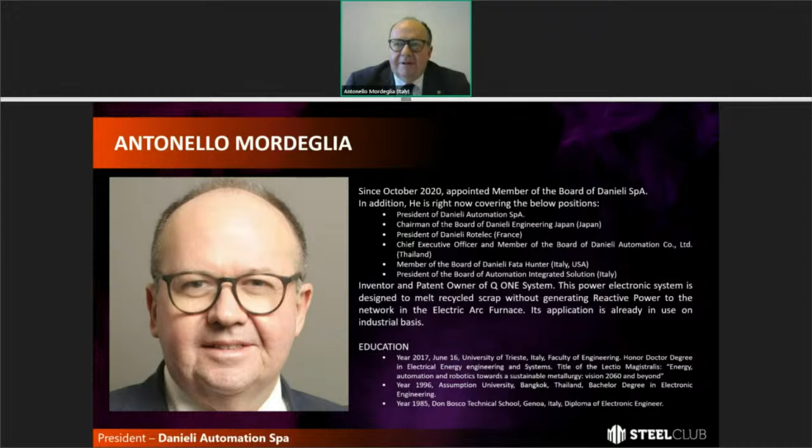It's related to a kind of review of the methods to produce steel today, and what is our intent as Danieli for the future.

As you can see here, even today when we are talking about green steel, most steel in the world is still produced with the first, let's say, technology, the conventional blast furnace, where practically the energy to melt the mineral is given by coal, coking coal, and oxygen in the converter. So practically, we have a very high environmental impact.

About 65% of the total global production of steel is still handled by this technology, because it's the most competitive, and starting from iron ore, it's also the most consolidated and, let's say, the most antique. So the point is, the emissions in this case are very, very high.

In parallel, the balance, about 35-40% of steel, is produced by electric arc furnace. There are different technologies. The process of electric arc furnace is about 120 years old. The first electric arc furnace was from Mr. Siemens, and then more new technologies came over the years.

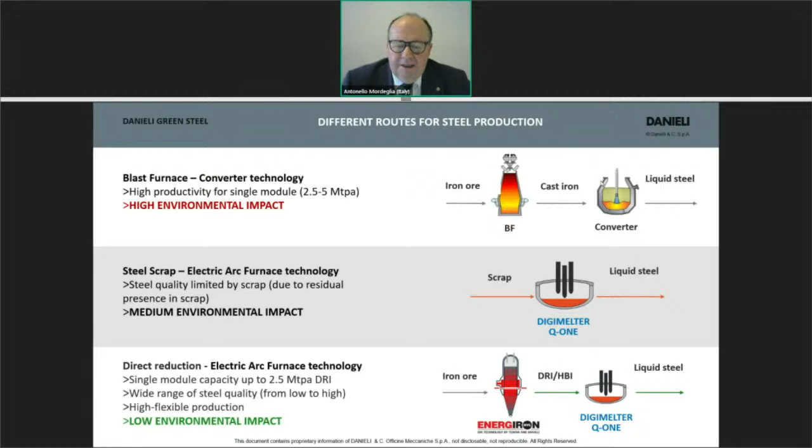Okay, next slide please. So the point is very much to move as much as possible. We need two components, two elements. One is for sure the hydrogen that must be produced by renewable energy. Otherwise, we still have an impact on the upstream part, the energy generation.

This means an electrolyzer, but one that must be somehow fed by renewable energy. On the other side, we need a lot of energy for our electrical furnace, which we renamed, let's say, giving it a new name: DDM, Danieli Digital Melter.

That is practically a new technology that will give you the possibility, with huge inverters, to use renewable energy to feed the energy to your AC, DC, AC converter.

Please, next slide. So in this slide, you can see how we practically apply this technology. We started this technology about 5 years ago as a prototype, and then we did some pilot plants, and now we're stepping it up further.

We already have a reference in the range of 100-ton digital melters. We take energy from a network. On the left side, we rectify it into a DC link that becomes a DC current, and then back with a powerful transistor. We use the same approach practically for power storage and for transportation systems, high-speed trains, normal trains, and so on—our market components. We produce again AC current.

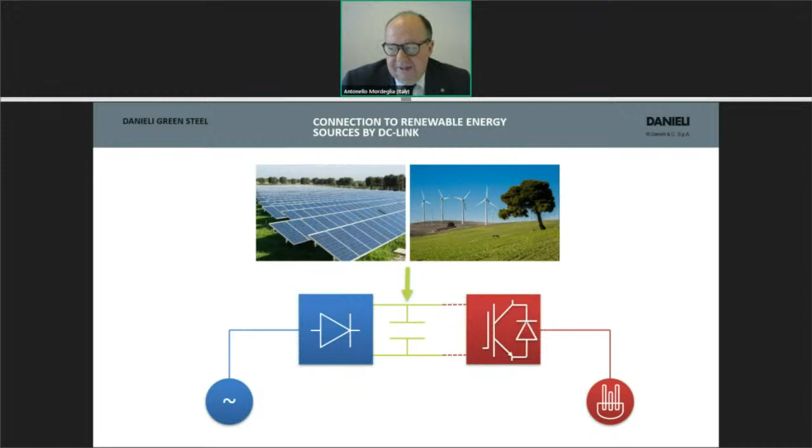This is a process that, compared to existing technology, gives you several advantages. There are advantages in terms of productivity because, due to the change of frequency during melting, we have the possibility to increase productivity or decrease consumption.

This is something we already test and operate in two plants, one in Croatia and one in Italy, where we dynamically change the frequency. Usually in the US and Canada we have 60 Hertz, and in Europe we have 50 Hertz. But that is a fixed frequency for a normal process.

What we did is change the frequency during melting, and we are achieving unbelievable performance in terms of power-on time reduction, energy consumption, and electrode consumption reduction.

The system is modular, so it's many modules, many inverters, many transformers of small size in parallel to create the energy that you need. So it's also very safe in terms of reliability for the system and for maintenance.

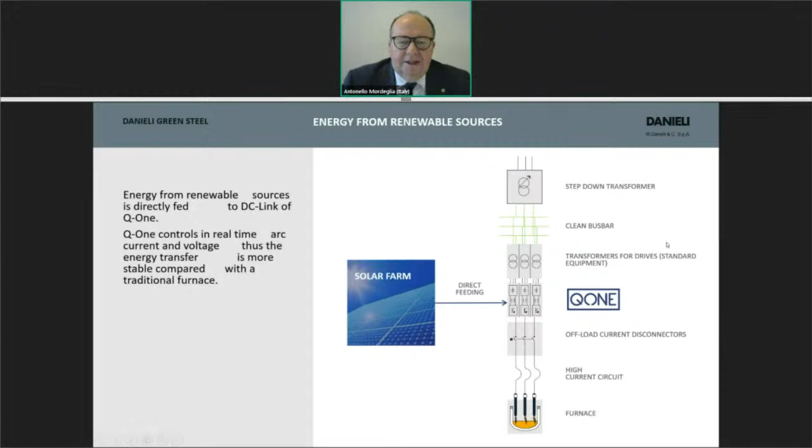Next, please. This is a kind of plant that we are right now already negotiating with several customers—a plant that is designed to be practically totally green.

How? Because you can create a kind of DC link inside your plant and run the melt shop, run the rolling mill, and your auxiliaries, all with self-produced energy or even partially from the network.

What is the vision? The vision is that more and more, the world will force us, as plant makers, to move to green. We have no real chance to stay away, because whoever implements this technology will be the winner. Whoever stays with existing technology will pay a very expensive bill called carbon tax.

And this technology is digital. Digital is outstanding because anytime we change the firmware in a device, it becomes like a new device, like your mobile phone or your computer.

In 7 minutes I cannot say too much, but this is a concept that has become an industrial product. I believe this is a very good technology for now and for the future, to think green and to think of a better world.

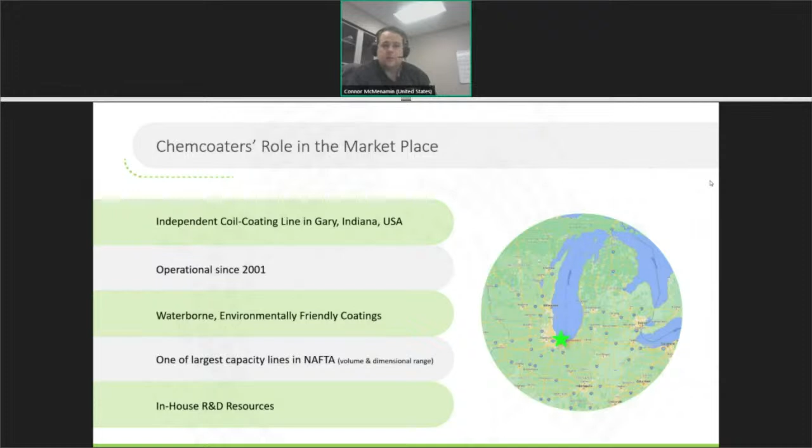What makes us a bit different, aside from our waterborne focus, is our in-house R&D capability, which has been a standout asset in recent years. If you could go to the next slide.

We were invited to talk about InterCoat ChemGuard. It's almost hard to describe this product accurately in 7 minutes, but we'll do what we can. At its heart, it is a totally unique waterborne modular coating technology that was developed here almost by accident, but really through trial and error. It is a corrosion inhibitor that we bring to very challenging environments.

We call it a zinc life extender over here. Many will not have heard of this product. It's fairly new to market by steel standards, but it's about 10 years old. So we would in many ways call it mature.

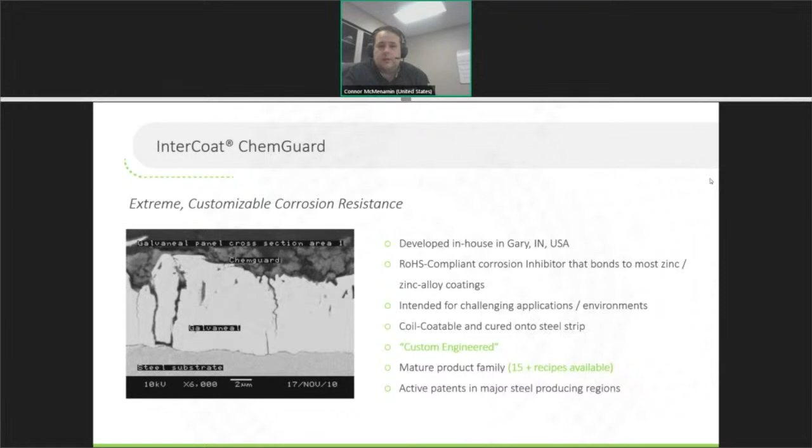This came about by tinkering, but through trial and error, and we started producing it in 2010 and 11 after a customer came to us in 2009 from the light gauge construction component area, asking for a coating that would allow them to basically upgrade or restore secondary galvannealed, add a coil coating, pass it through a cold reduction process on a strip mill, and then still outlast G40 or Z100, Z90 in a salt spray chamber by a factor of 3 to 4x.

I wasn't there at the company at the time, but I would guess that we probably all walked out of the room laughing. And then at some point we got to work and came up with a coating that did just that.

Now, I showed this picture a second time, and the reason I show it again is to comment that this SEM photo is actually our coating post-cold reduction. So the strip in question here will have been elongated probably through a few passes and 30, 40, 50%. So our customers have really been able to increase linear footage, piece count, and value just by adding a relatively inexpensive coating back onto secondary steel.

I spent about 10 years at a major steel mill in Europe and in various different regions, and I did not believe before coming here that such a process was possible, let alone productive, and it has been one of my great surprises to see how strong this product is. Next slide, please.

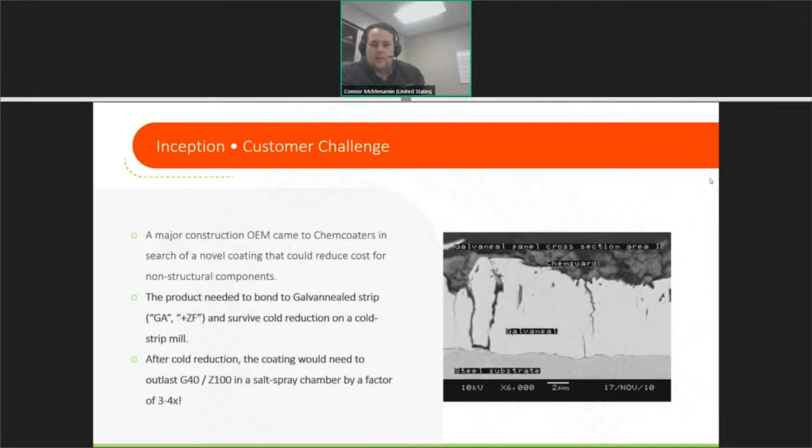Not only did we find in the end that we could really attack corrosion problems for customers, but the fact that we could go through cold reduction allowed us to tackle other problems. So we found that we can create a thin film acrylic for the agriculture industry. We've got self-healing and cut edge protection. So if you're perforating, if you are stamping, we can still help around those edges.

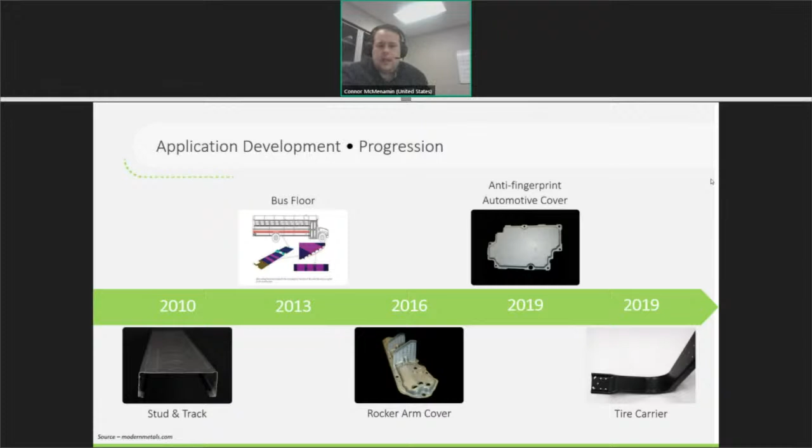Next slide. Thank you. This also makes us wonder at a macro level to what extent we can work on a few larger changes in the industry.

For example, if you are able to take a Z100 and provide the corrosion resistance of a Z700, I use Euronorm, but G30 and G235, do you need that many different SKUs? Can you buy G30 with Intercoat ChemGuard and apply them to your entire inventory? Do you need passivations? Because we're doing the job of a passivation and it's a permanent coating. So do you need a ChemTreat?

You can save money on zinc if you're a galvanizing line. You can also reduce your CO2 emissions based on applying our chemical instead of buying so much zinc.

Now, traditional technologies have a place in the market. We don't claim that we are the end-all be-all, but we think that we are part of a suite of solutions to help the industry address its issues. And then lastly, a common theme I've mentioned over the last several minutes is if we could do this one coating, which shouldn't really be possible, what other options are out there for us? What other things can we try, especially using this modular base that our R&D team has developed?

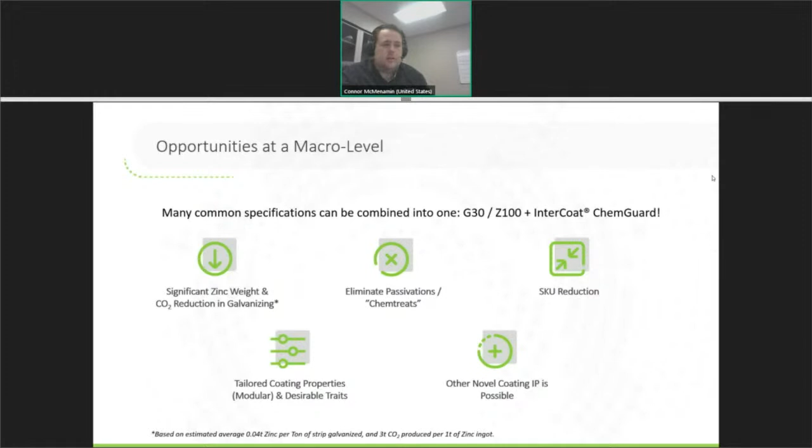Next slide, please. And then, the question on our end, or others' end, is okay, what's next for ChemCoaters? We are a one-line operation currently. We operate chiefly in the United States Midwest, a little bit on the East Coast and Southeast. So for us, it is to almost evangelize our technology.

We've got projects in the NAFTA region that we are working on currently with select partners. We'll have orders this year for our product, but galvanized at a traditional galvanizing line. So we will help customers access our product outside of that, let's say 400 or 500 mile range in which we operate, so that if they have a corrosion issue in Mexico, they can ask a local galvanizer there to work on it. And then from there, once we are set up in NAFTA, once we have those intricacies of the international development down, we plan to help our customers source even globally.

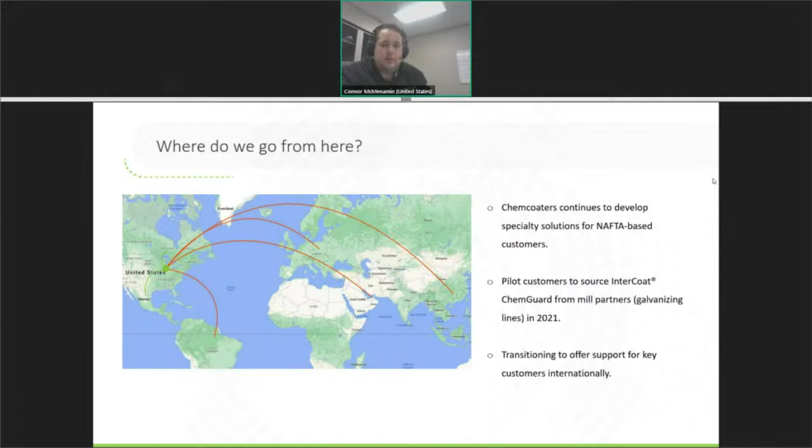Automotive specs are global in many cases. Transportation specs can be global in many cases for bus and truck trailers. So we hope to expand from our one-line operation in Gary to really be a global solutions provider. So it's a very exciting time. We're all dealing with COVID, but this is the best time to try new things in my view.

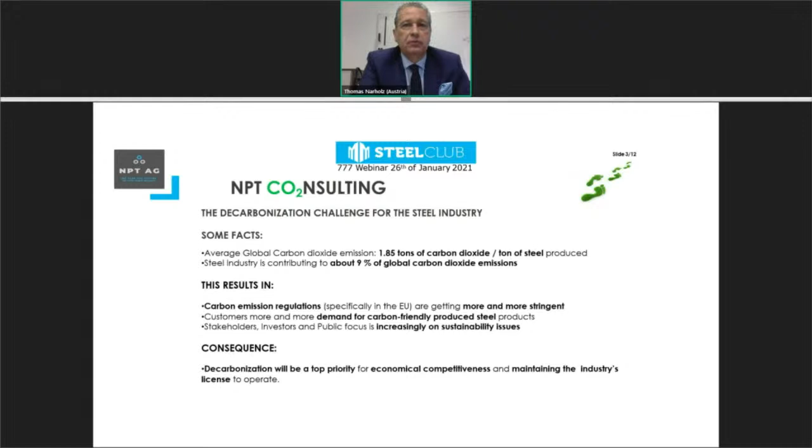What can be done to push decarbonization of the steel industry? On the one hand, CO2 formation can be reduced. These are common technologies like increasing blast furnace efficiency through increased fuel injection, such as hydrogen, PCI, etc.

It can also be done through the use of alternative reductants, for instance using different fuels like biomass, to reduce the carbon footprint of the reductants, specifically the fuels used.

We could also capture carbon and use it. There are technologies to capture fossil fuel emissions and transform them into new products, reducing the carbon footprint. Or we can apply new technology, or a combination of existing technologies, for decarbonization.

This means replacement of blast furnace and converters by electric steel making, with or without preheating. All these technologies have to be evaluated for fit at each site. This includes a combination of a DRI plant and electric arc furnace, with directly hot DRI charged into the furnace.

Here on the DRI plant, we have the option to use natural gas as a reductant, or hydrogen, which is the next step in terms of decarbonization of this DRI plant and electric arc furnace combination.

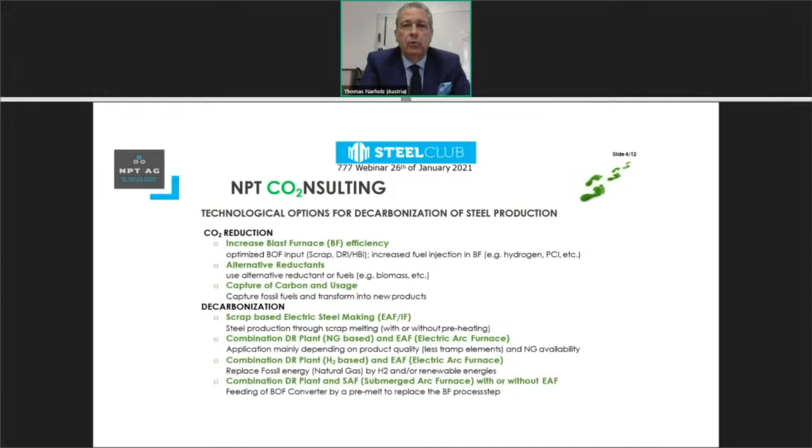It could also be a combination of DRI plant and submerged arc furnaces, as is also offered on the market. This can be combined with or without an EAF, where you can basically produce a pre-melt to be further processed in the BOF. Next slide.

What are the benchmark figures in terms of carbon footprint?

If we see the traditional route of blast furnace, basic oxygen furnace, as we said before, it's on average about 1.8 to 1.9 tons of CO2 per ton of product produced. If we go to a natural gas-based DRI-EAF combination, we are around 0.6 to 0.7. If we go to a DRI-EAF combination with H2 as a reductant, we are at 0.3. And the carbon footprint of a scrap EAF is between 0.1 and 0.3.

And all of this, for sure, is depending on the way the electric energy is produced, whether it's done by solar, water, nuclear, or coal-based power, and is depending on the charge mix which we can feed to the EAF. We have a tool for melting which is extremely flexible, which can use scrap, DRI either hot or cold, HBI or hot metal. If still in existing traditional steel plants we have an overcapacity for a certain while of hot metal, the reductant which is used in the DRI and HBI production, and also the means of transportation, how we transport the raw materials into the plant, are aspects in this calculation of CO2 footprint.

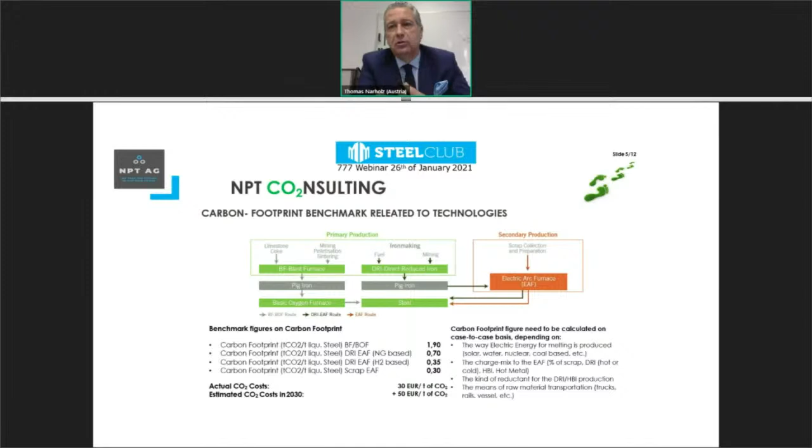If you compare a blast furnace with H2-based DRI-EAF production, you have a delta of 1.4 to 1.5 tons of CO2 per ton of steel produced. At the cost of 50 euro per ton, we talk about a burden of 80 to 90 euro per ton of steel just by the way you produce it. And here all the triggers are set in terms of how to produce steel.

Next page. What we have seen in a lot of projects where we are involved and trying to implement this in different plants, more and more the DRI and EAF combination route is, let's say, the most favorable solution at the time being. That does not mean new technologies will come up and change the equation a little bit, but the fact is that this combination is proven and an established technology, and the EAF is extremely flexible in the charge mix.

So that means it can be combined in different ways. It can be cold, hot, always depending on the layout which is possible to implement. The EAF is also fully flexible in tap weight to be adjusted, whether you would like to replace the full capacity of an existing plant or to increase or decrease your capacities.

EAFs, as already said in our first speech we saw today, can be fed by green electric energy via wind or solar power to bring the CO2 factor close to zero. DRI plants can be arranged either very close to the electric arc furnace to have hot DRI charging for further decrease of the electric energy used in production, or can be placed wherever, and then cold DRI can be charged to the furnace.

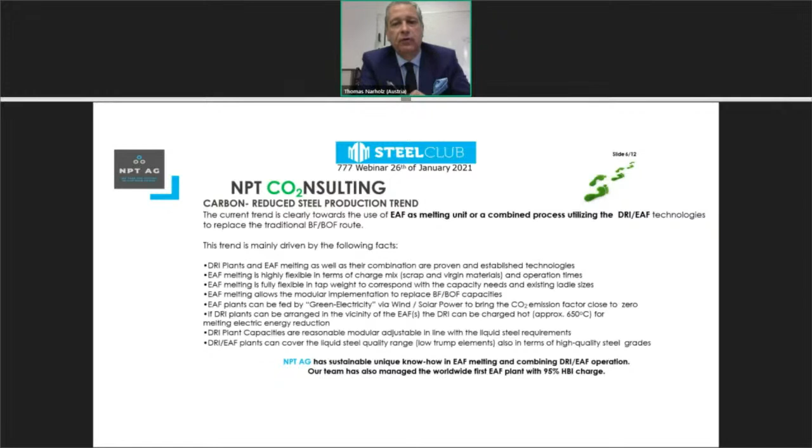It's also the case that DRI plant capacities are modular and adjustable with the liquid steel requirements. And it can also cover, which is very important for existing plants, a certain liquid steel quality range, which purely with scrap is not possible to manage. So we always have to look at the final product already produced in a traditional plant, and here we have to find a way to balance the trump elements in the liquid steel.

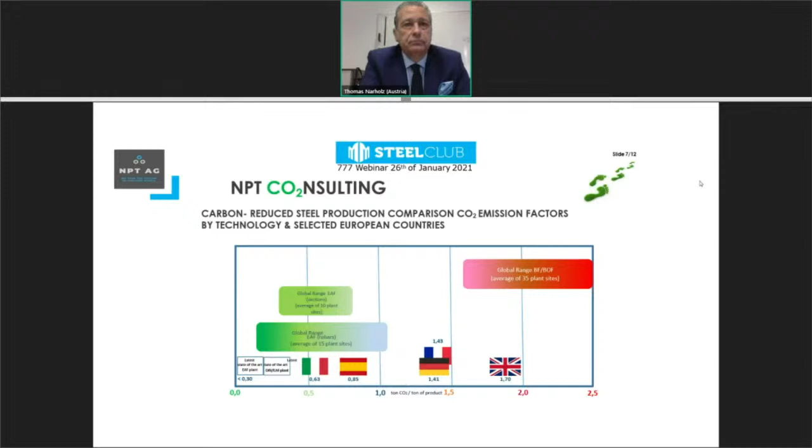Next slide, please. Next slide. Just a small recap of what we are doing.

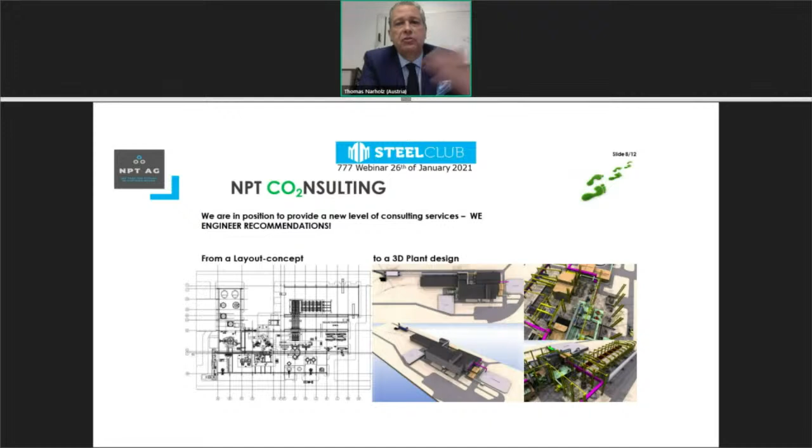We are not a typical consulting company. We say we engineer recommendations. That means we are capable of taking whatever we see in the plant from 2D to 3D layout at an early stage. This will allow the plants to really understand how things can fit into an existing site. We all have to understand that BF, BOF plants are very often traditionally grown and a mixture of a lot of things arranged. And here, for sure, we can help a lot to have a clear picture of what then to tender to the typical plant suppliers.

My name is Falk-Florian Henrich. I am CEO of Smart Steel Technologies, based in Berlin. Smart Steel Technologies provides ready-to-use software products for the optimization of the steel manufacturing process chain. The resulting optimizations lead to permanently improved quality and reduction of energy costs, and this is achieved without investment overhead for new physical equipment.

So mainly what we do is focus on the existing equipment, the existing plants and processing lines, and we apply artificial intelligence to these lines in order to optimize energy and quality. Therefore, our approach to the topic of sustainability is to reduce waste in every individual stage of steel manufacturing. Next slide, please.

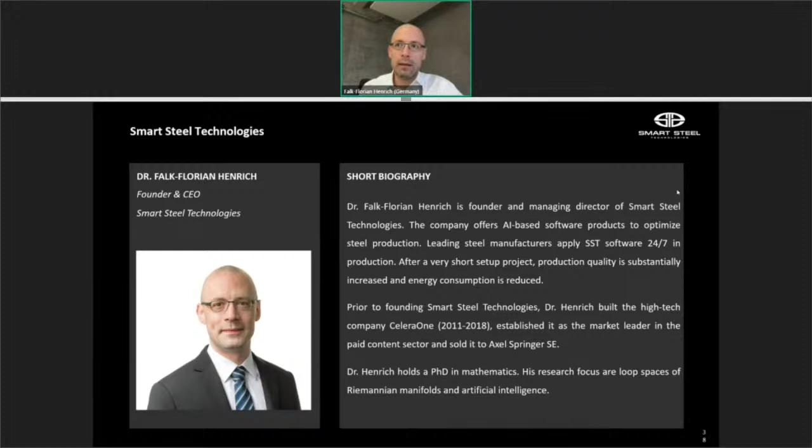I would like to use this very short amount of time to explain this using a very concrete example. Before I go into this in detail, I would like to make clear that everything I am talking about is already running in production 24/7 since a longer period of time at multiple of our clients and steelmakers in Germany. So the example I would like to explain is how AI can be used to reduce waste in the form of quality costs and quality deviations in flat steel manufacturing.

In one of the previous talks today, we already heard about galvanized and galvannealed products, and one application sector of flat-rolled galvanized steel is certainly the automotive sector. In particular, automotive exposed applications require the highest surface quality, perfect cold forming, and additional strict tolerances for the mechanical properties. When we focus on the topic of surface quality, which is certainly the most troublesome for all steelmakers involved in automotive exposed grades,